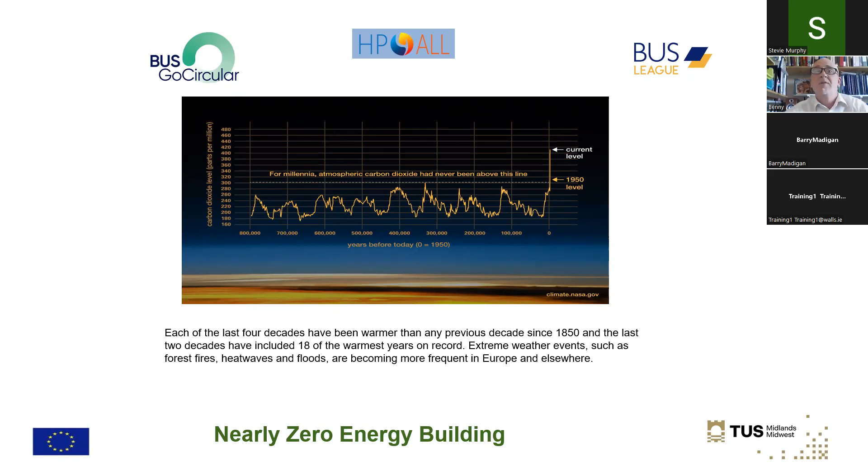So basically how it all started with the Energy Performance of Buildings Directive in 1997. The Kyoto Agreement came through, and then we had the Energy Performance of Buildings Directive. It was recast, and it's actually being reviewed at the moment. I might throw a controversial one in there - I've been in discussion with people looking at European level, and nearly in the future it's probably going to become net zero.

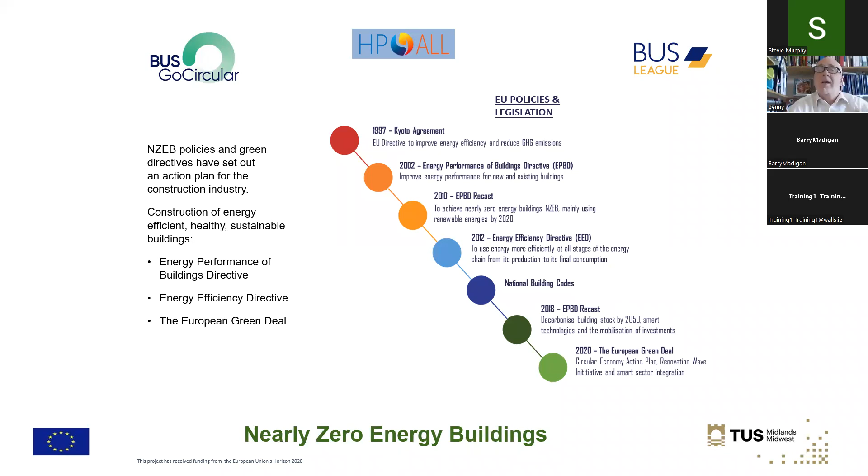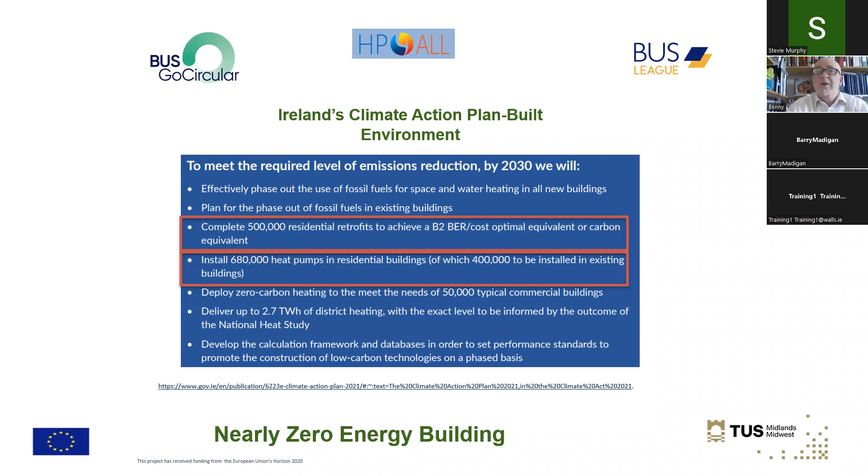Over an annual balance of a year. So this is the Irish Climate Action Plan, and two of the big pop-outs for us at the moment in buildings: 500,000 retrofits have to be done to a B2 BER - a lot of them are being improved, we're hearing better now than a B2 - and install 680,000 heat pumps, and 400,000 into existing buildings. So big targets there, big requirements for us in the future.

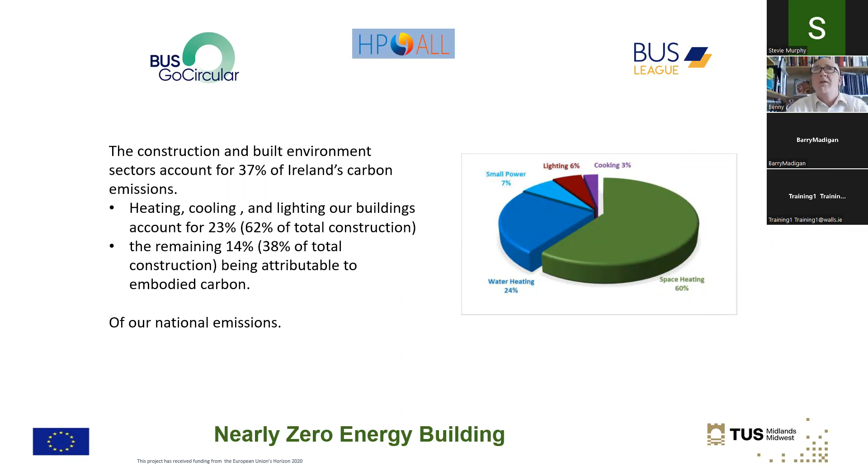So the construction and built environment accounts for 37% currently of Ireland's emissions, heat and cooling, lighting 23%, and the embodied energy and carbon emissions due to life cycle analysis - we'll talk about that in, I think it's webinar 8 - is 14% of our total emissions.

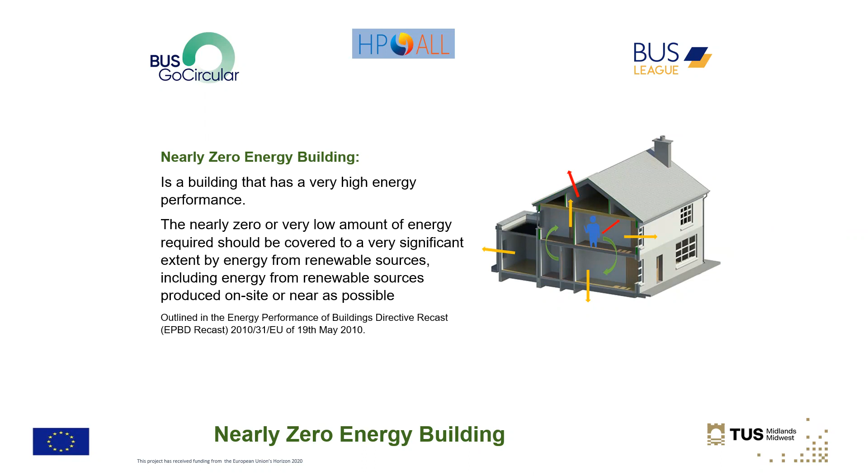So nearly zero energy buildings from the EPBD, Energy Performance of Buildings Directive, means high energy performance, low amount of energy required, and covered significantly locally or close by or nationally by renewable sources.

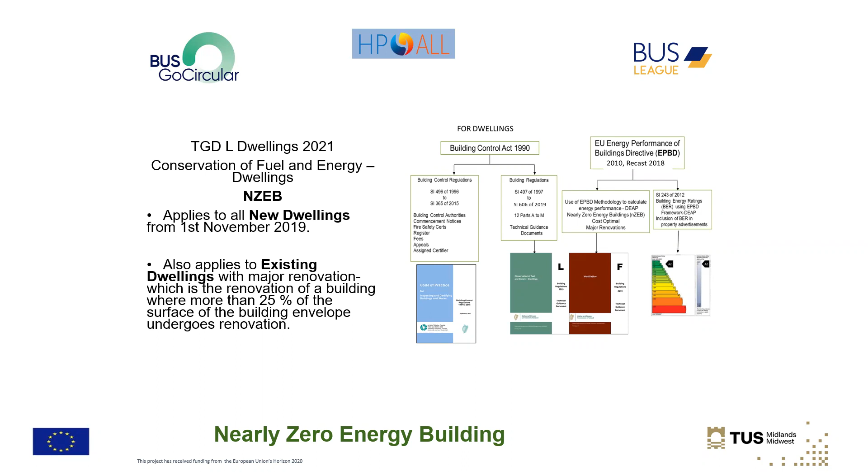So they were updated in the 2019 Part L Conservation of Fuel Directives, and updated again in 2021. Not a huge amount changed in 2021, but it's still a good document to read. It applies to new dwellings, and to existing dwellings where there's a major renovation, responsible for over a quarter of the building envelope surfaces. There's ways of calculating and looking at that in Part L - won't go into it in too much depth.

So to certify the building and see that you're in compliance, we use the Dwelling Energy Assessment Procedure, which is the DEAP, which the BER assessor has to model and comply with.

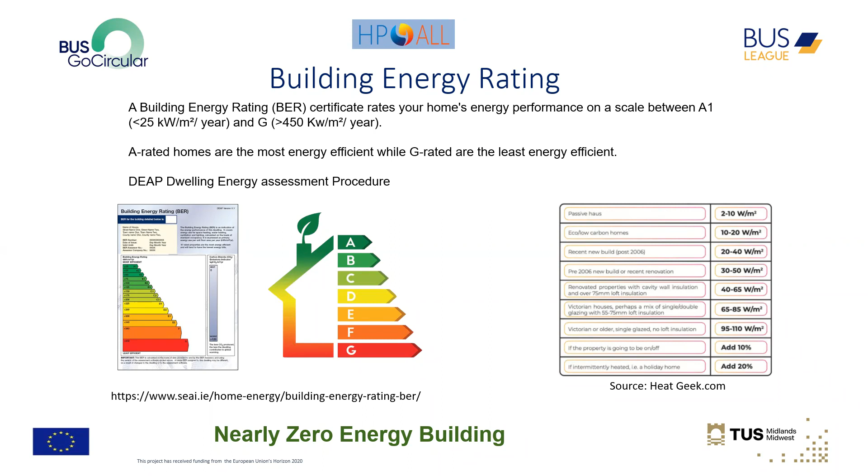So currently it's 70% of an improvement on a dwelling from 2005. The EPC, the energy performance coefficient, and the carbon performance coefficient have improved by 70% and 65% respectively. The renewable energy ratio is 0.20, which is 20% required.

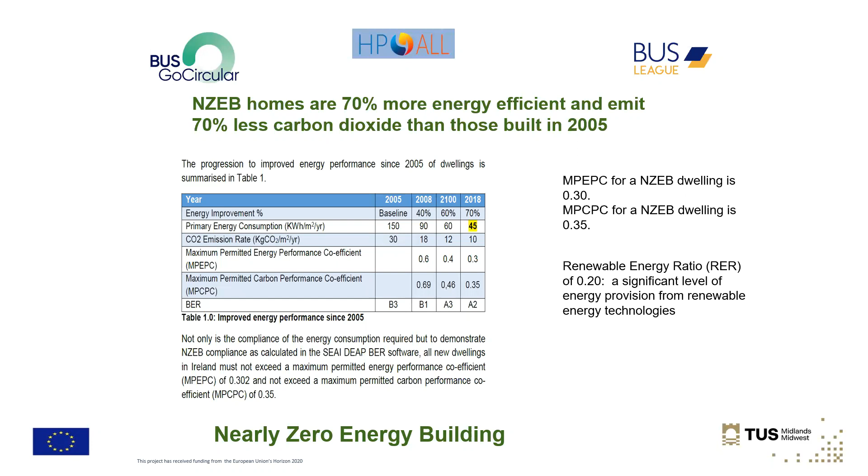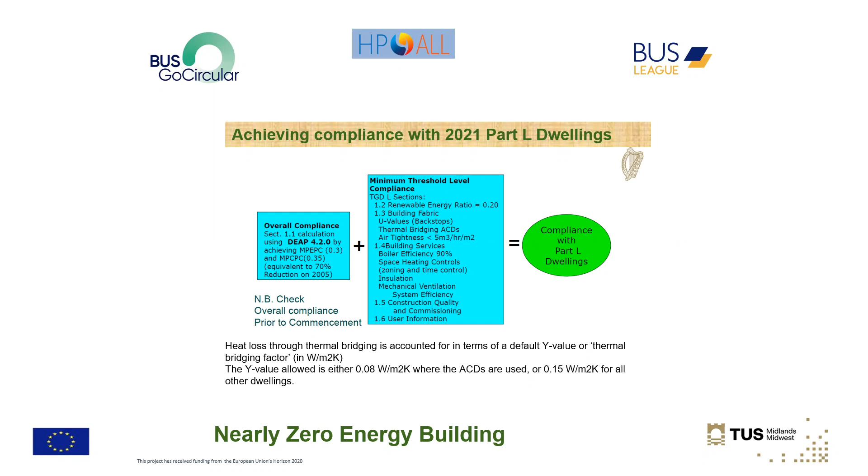So as I already mentioned, how we check that that's compliant with the building regulations is through the DEAP. And there's a big thing I've noticed in modeling - if you use acceptable construction details, your psi value for your building's thermal bridging goes down quite significantly, and you get a better performing building, but it can also bring up your BER rating.

So this is a nice little photo that we took when we were in Mount Lucas, which gives a bit of an overview. It shows continuous insulation, airtight vapor control, low thermal bridging, reduced psi values, high performance windows, mechanical ventilation where required - that's if you're below 3 cubic meters per square meter per hour.

Which we're finding a lot of buildings are getting without even trying too hard. They're able to get it because the construction training of NZEB is proving that it leads to better performing and better delivered buildings.

High efficiency heating, that's looking at your heating system, thermal losses, insulation in your heating and mechanical ventilation systems, and also renewable energy.

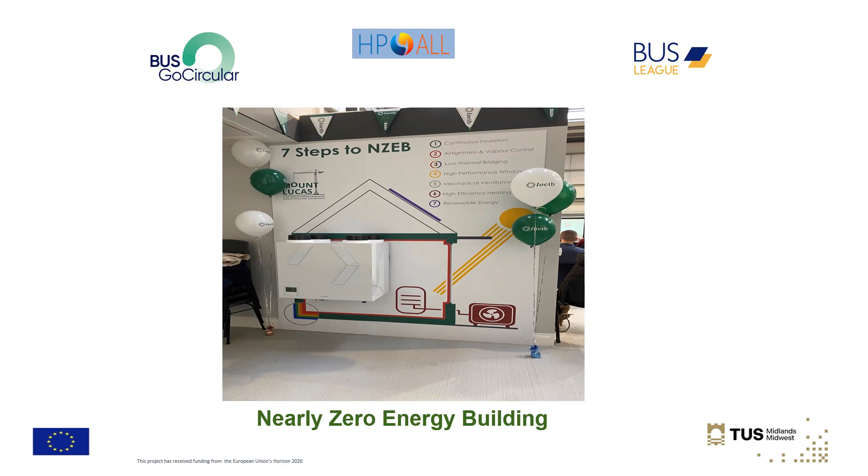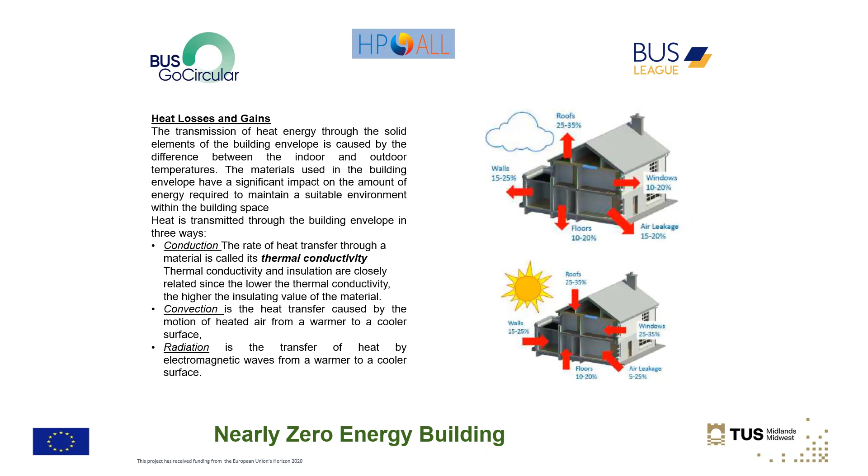Heat losses and gains, as shown in the picture on the right hand side, involve conduction, convection, and radiation, which are different kinds of flows. The heat losses occur during the heating season, shown at the top, and the heat gains, which we're noticing nowadays with overheating becoming a thing in buildings across Northern Europe where it wasn't really a thing before, are the gains that can come into your buildings as well.

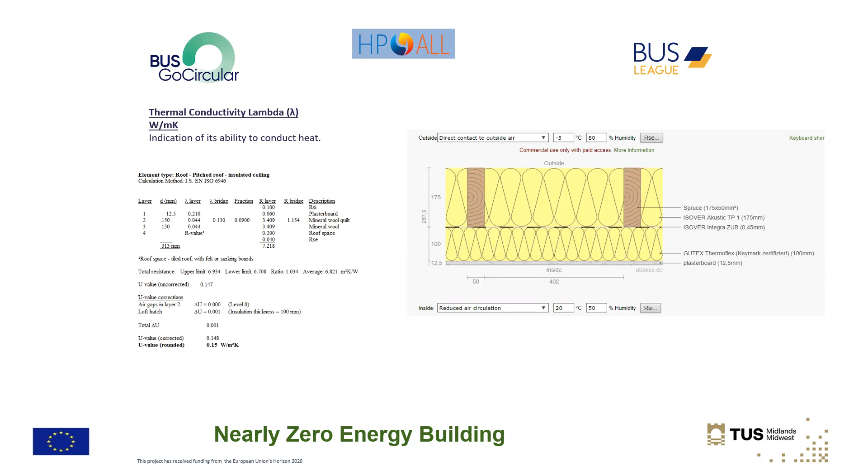So I'll do a quick intro to U values. On the left hand side is a U value calculator. To calculate it, you use all the different elements that make up your fabric, calculate them, and they give you an R value - divide 1 by that and that gives you a U value. I've given a quick picture of a U value calculator I use, which is quite good and gives a nice 4-page PDF outline of your building fabric's U value. The U values can also be found on page 47 of Part L of the building regulations, TGD.

Also, all manufacturers' websites will give you the thermal conductivity - sorry, not U values, I mean thermal conductivity, that's the conductivity of the insulation material. There's a nice quick calculation someone gave me before: if you're at design stage and want to figure out what thickness of a particular material will give you, using just the insulation, not the whole building makeup.

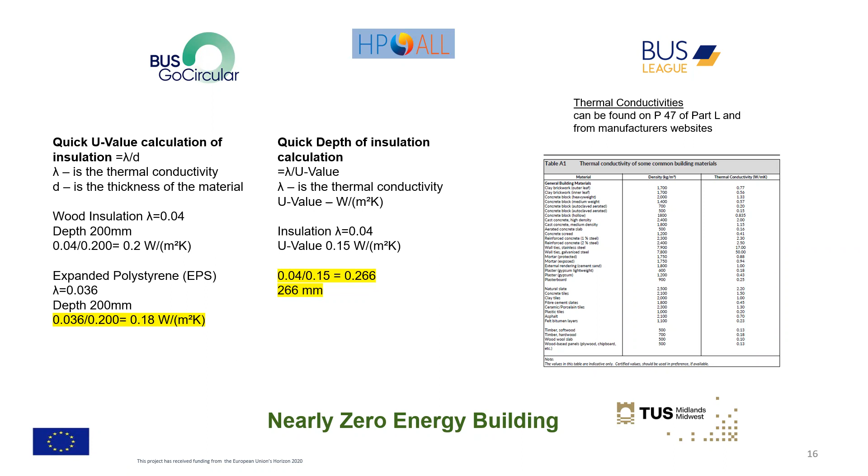So it'll give you a bit of an idea what your U value will be, shown on the left hand side. If you divide your thermal conductivity by the thickness of the material, it will give you the U value. And if you want to reverse that to find out what thickness of material you'll need, divide the thermal conductivity by the U value, and it will give you roughly the thickness required. But you still need to work out the whole build-up, the makeup of the whole fabric - that's just a quick overview.

These are some nice U value calculators that I use. The one on top is the BRE, the Building Research Establishment. The one on the right hand side is Ubicus, and the one on the bottom is a sheet from the PHPP. They're all certified to the standard for thermal conductivity, and I've checked them all across the board - they all work very well. So if you like the internet one, Ubakus, or the sheet tool, you can use whichever one you like.

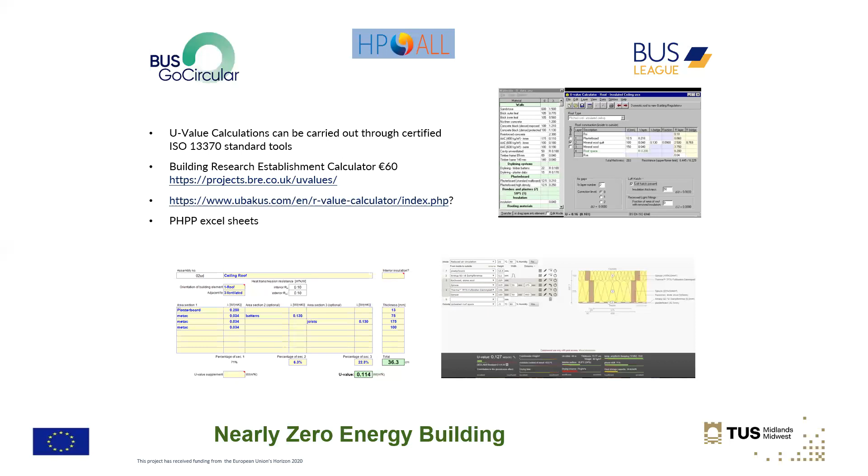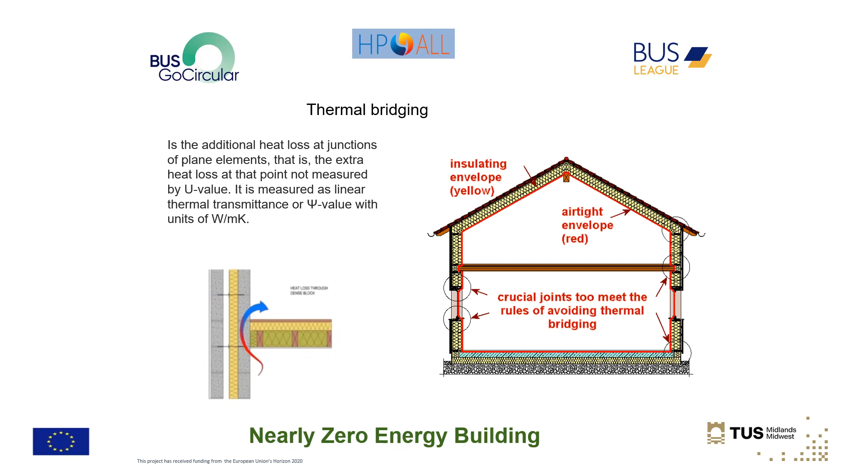Thermal bridging is another big thing, as I mentioned, in heat loss and heat gains - where the plane elements join, so your U values and fabrics join up with each other, and that can be a crucial area. As you can see from the picture on the right hand side, where the thermal bridge and insulation isn't installed as correctly as it could be, there's heat loss there, and that could cause interstitial condensation, heat loss, mold, and condensation on the internal walls - causing issues.

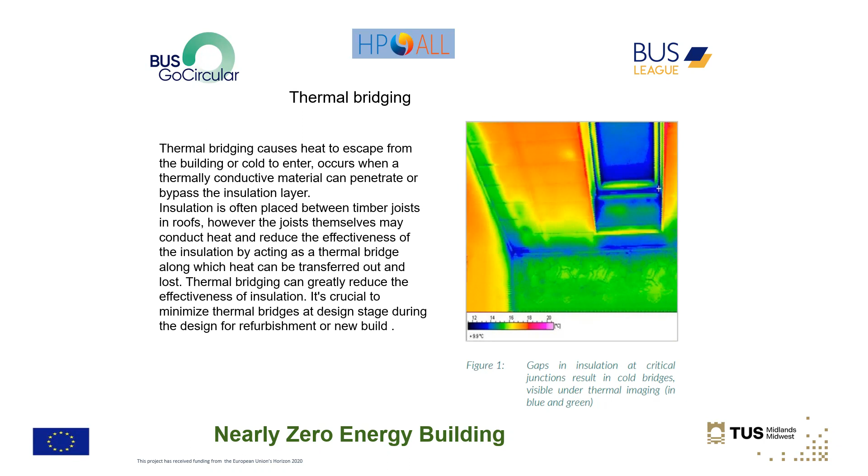And also, we find that mold can cause spores to be floating around in houses, which can affect people's health. So it's not just building heat loss - it's internal air quality and lots of other things at stake too.

So here's a quick review of air tightness, and that's during the heating year when it's cooler outside - your warm air wants to go to the colder area. But if you revert that for the summer season, that's where warm air can possibly come in and cause your house to overheat as well.

In certain instances, they're finding now what's called the heat island effect - in cities and towns, because the concrete and a lot of the fabric and roads are soaking up heat during the day, at night when people want to use their windows for cooling, the radiation and heat radiates back off these elements, causing the air to be warmer, and they're not managing all the time to be able to cool their buildings.

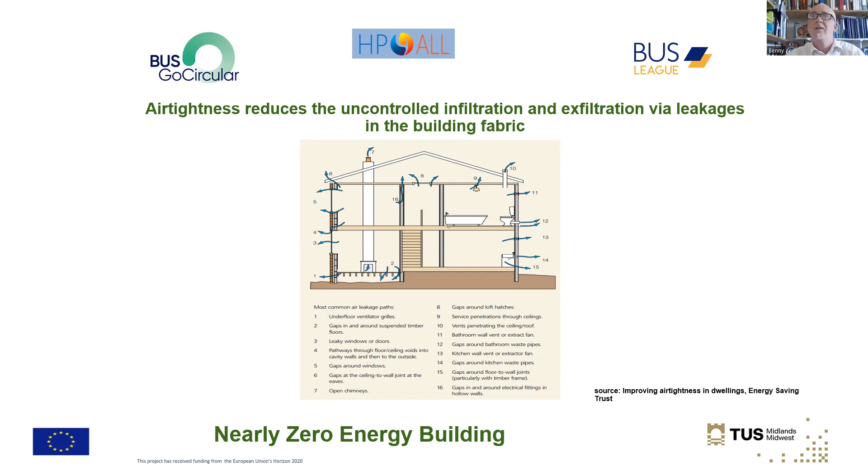So there's a thing about airtightness and maybe cooling requirements in the future, especially in urban areas. I'll just go through the U-values here for new builds in Ireland.

I might be controversial here, but I would not use a 1.4 U-value window if I'm putting in a new window. There are windows out there with a standard of 0.85 to 0.7, and they're about 8 to 10% more expensive than windows of that higher U-value. And doors nowadays, if they're new, can have a U-value of up to 1 - composite doors and all that, and they're all certified.

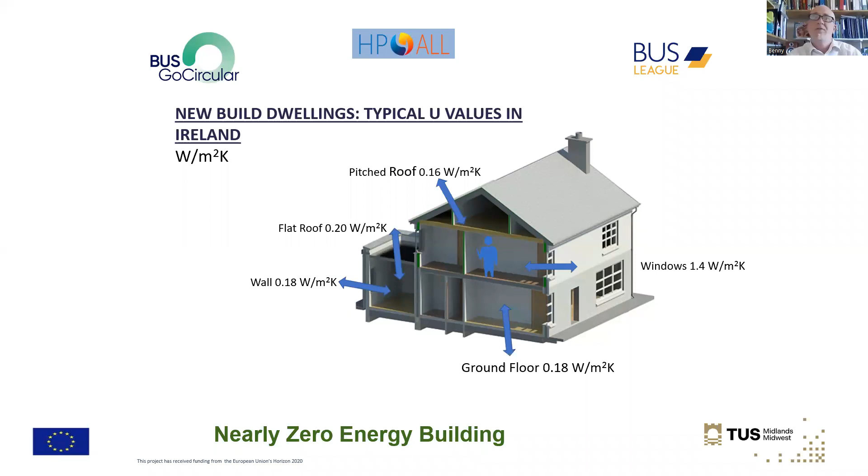So for retrofitting, these are the U-values, and this is if it clicks on that 25% of the surface requirement. But I'll go into that in another section, so I won't mention it yet.

If I'm replacing my windows, not doing them up, I would go for a better U-value than that. That's my personal opinion, because the overall energy balance of the year means it stops heat loss over the winter, but also the good U-value and the good G-value, the solar gain value on the glass, stops overheating as well at certain times of the year.

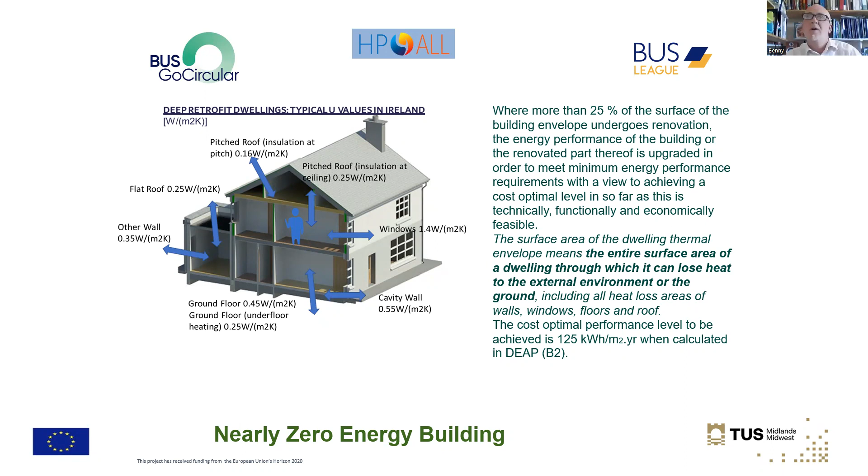East facing, the air is not too hot in the morning, but south all during the day and west during the evening when the air is warmer, the radiation can get into your house more easily. So I'm open to any suggestions that might disagree with me on that, but I would go for as low a U-value for your windows as possible if you're replacing them.

In architecture, with historical and heritage buildings, we have to look at the whole picture. We can't just go in there and, as I joke about, put plastic windows into Kilkenny Castle or retrofit Dun Aengus with external insulation. We have to look at the heritage and the culture of things and do what we can.

There's lots of materials out there that work really well with older buildings. They're breathable, they've got more heat attenuation, and they're able to soak up heat and give it away.

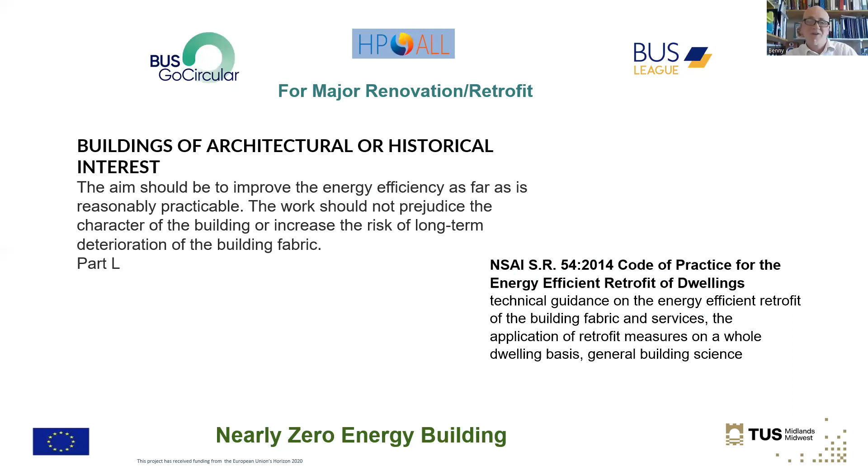The code of practice is a very good document to read over as well, the SR 54 - there's a lot of good information in there. There's a lot of reading to be done when you want to get into this stuff, and I suppose I don't have a TV, so I've done a lot over the years.

The grants available at the moment for major retrofit for dwellings include a one-stop shop which looks at the whole picture and wants to do the whole retrofit in one go. And then there's individual grants - this inverted triangle gives us the climate impact, but all these measures are actually worth doing, including energy storage.

I have batteries at home now. My solar PV is producing more electricity than I need - the load on in the house is only 400 watts at the moment, but we're producing about 5 kilowatts, so my battery is charging. There are options for renewables where you can heat your water and maybe even turn on your heat pump in the future.

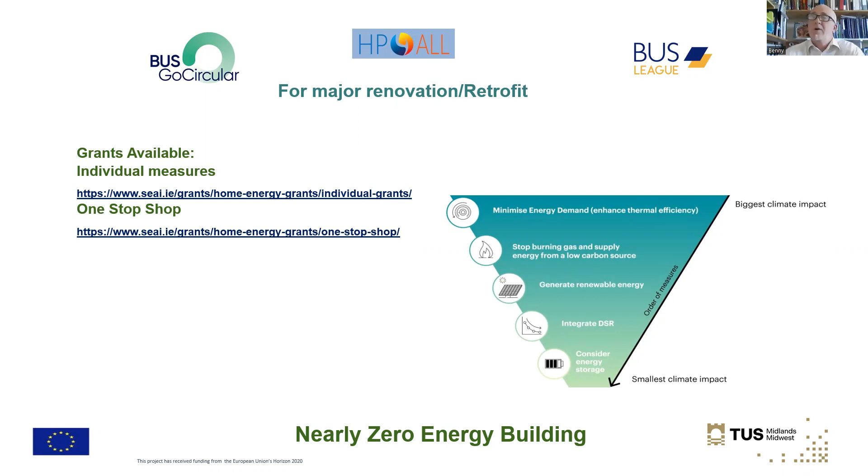This is the smart buildings concept. Another thing we're looking at with the Tipperary Energy Agency SuperHomes and the IGBC is to have a building passport. So if you don't have the facility at the moment to retrofit everything in your building today, this week, or this year, you have an overview and assessment - a passport that shows all the measures possible in the future.

And that means that you might not do something today - insulation, windows, or airtightness - that you might have to go and change in the future.

So it gives an overview and a potential for your building. We're looking at maybe having a logbook for a car, which is about 1.5 inches thick, 40 millimeters, 48 millimeters. But sometimes when you get a house handed over to you, you get a key and one sheet of paper.

Whereas we always believe, when we were installing renewables and doing sustainable buildings at the time, we'd always give the homeowner a day with probably the plumber, the installer, even the electrician, and someone that we'd all go through and show them how the building worked and how all the heating systems function. Because when we've got smart buildings, the occupants need to know how these buildings work and how to adjust different bits and pieces for heating.

I always believe that it takes at least a year or two heating seasons to figure out how your heating system is working, because certain things work differently in different circumstances.

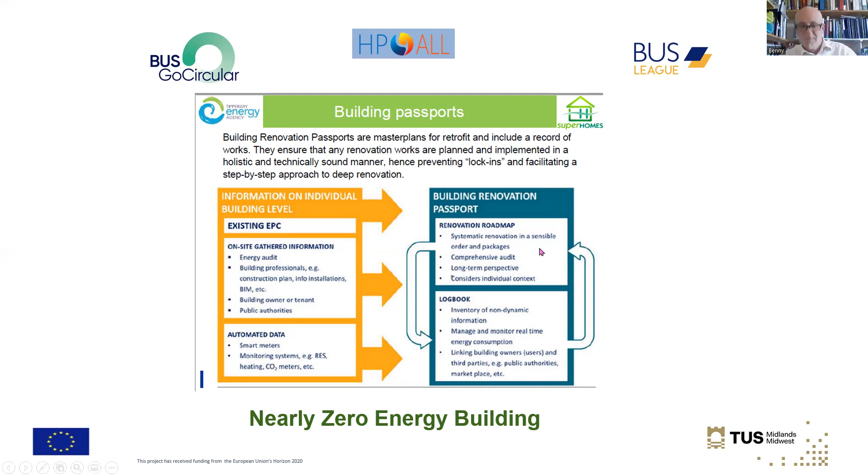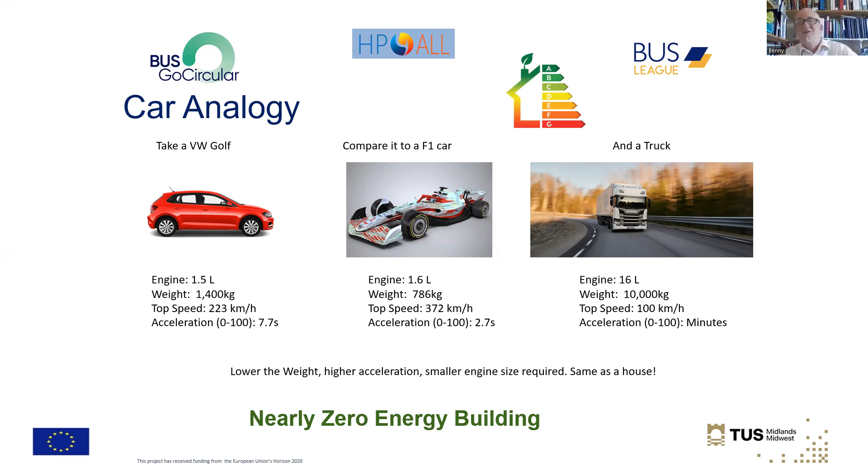I'll just show you there on the wood pellet. I have a wood pellet stove that heats my underfloor and does my space heating as well. It's cost me €1,200 - I love data - in the last 4 heating seasons. So it's basically cost me 300 quid a year to heat my house at the moment.

Our heating system isn't quite to passive standard - I failed a bit on the air tightness test - but we've had our heating off since March, and probably won't turn it on again for a while. We haven't turned it on before towards the end of October in the last 3 years.

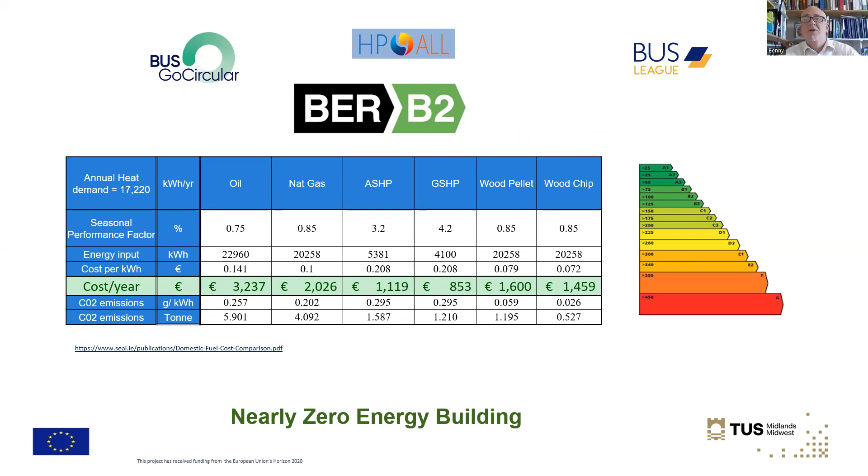So I modeled, I just did a quick thing in the BER DEAP there just to show you how you can get even from an A3, which is energy at 58 kilowatts per square meter per year. That was quite high efficiency with good planes and a low heat loss indicator.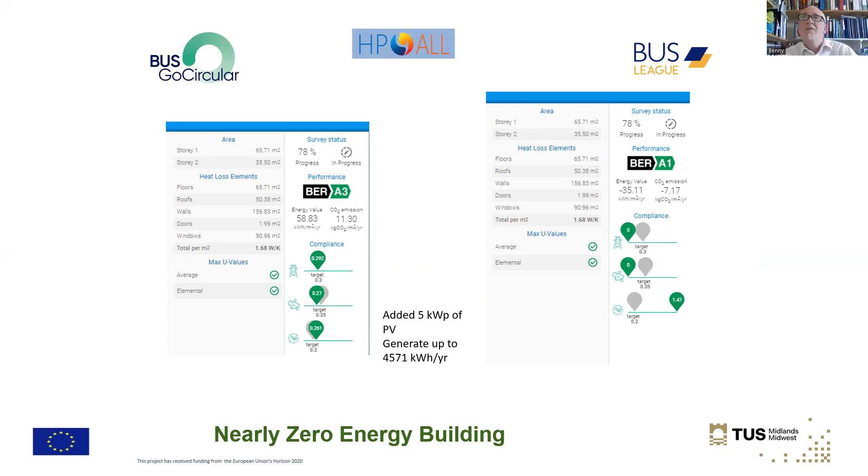And I threw on 5 kilowatts of PV into the renewable tab, which generates 4571, and that turned the house into an A1 minus energy rating. So it's actually negative energy use and negative CO2 emissions. Just showing you there that renewables are a good option in certain circumstances.

So I suppose smart homes of the future will be where everything talks to each other. Your solar system will talk to the house, and if it could heat the water or charge your car, if that's what's required, or charge your battery that you might have in storage.

In the future, if you've got too much solar, even in the winter, it might turn your heat pump on. It could go to sell to the grid if somebody down the road needs some. You can donate to the grid.

We're doing a pilot scheme with the IERC and Glasgow Energy at the moment, where I could virtually donate electricity. I spilled 1.7 megawatts, 1700 kilowatts to the grid in the last about 150 days, but for the 200 or 300 quid extra a year, I'm not overly pushed on that - I'd probably spend more than that on coffee. So I wouldn't mind donating virtually to fuel poor houses in other parts of the country.

So if you can instruct the utility to take it off, it can be done in the future. We're not there yet.

And obviously rainwater harvesting is another very big thing that we installed in a lot of houses in the past, because we're looking at the loads. The reservoir levels are getting down, and I've been involved with Trinity College guys with a couple of hydro projects, and we looked at rainwater harvesting and stuff like that as well. We only need about 1-2% of our water needs to be potable drinking quality.

So the other note said we'll just call it 90% can be our rainwater, and it can do the flush the toilet. We can wash in it. We can wash our clothes. We can even use it in the dishwashers and all that. And you can actually get a filtering and upgrade system where the rainwater is certified to potable quality.

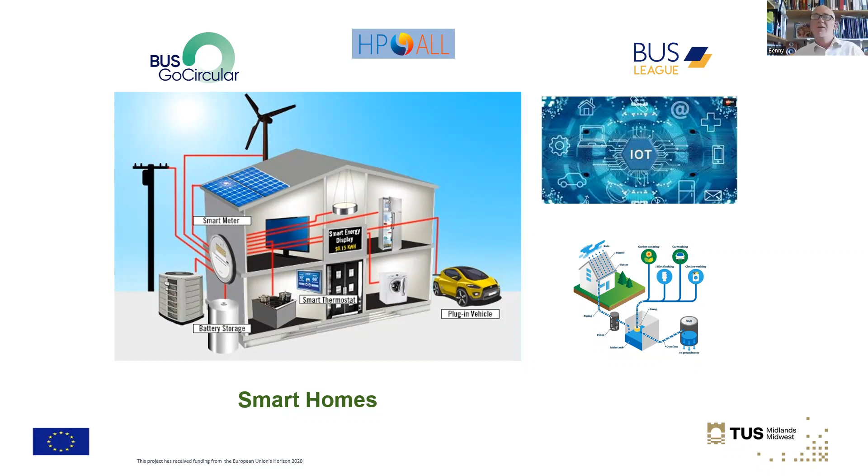I think in the future that will come more into the DEAP assessment, because the guys from Trinity made a nice point once: why are we flushing food down the toilet? Because it's a food grade substance, potable water. Stop talking about that now.

So the other thing is modern methods of construction. I'm in touch with PJ Rodden on certain things there, where offsite construction is more efficient, it's faster, it certifies a lot of the different parts of the fabric, and it can speed up and deliver faster, better houses. It's got lower embodied carbon, lower waste, and lower other impacts.

We also have on the left hand side here a project called BIMzeED we're doing, which is BIM and NZEB all mixed up together. If anybody's interested, you can go and log into that site. We've got 12 learning units there that are very informative, which we worked on with a good few European partners, and all the information is free. The website's open for the next 2 years, with PowerPoints, PDFs, everything free to download.

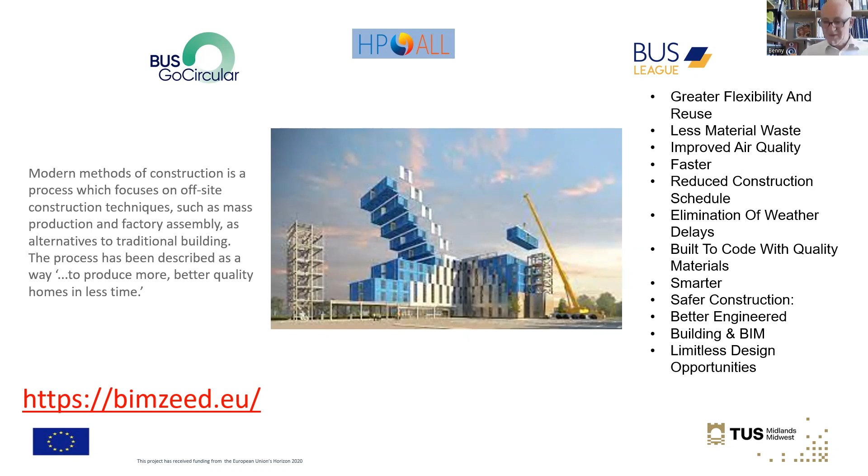So just a quick overview now - I think I'm 23 minutes over time - an overview of some of our other projects.

Our green public procurement project is where we're creating training. Stephanie's creating training for an online training course which we're going to be delivering in September, aimed at local authorities. So if anybody here today works for a local authority and is interested, give us a shout and we'll put you in touch with the project lead.

This one, BUS GoCircular, is where we're looking at blended measures to get energy demand and training for NZEB across the whole sector. This Build Up Skills app is also something we're working on.

We work with the SEAI, IGBC, and it was just two of us before I came along. It's a place where in the future you'll be able to go and look for training for your particular role - whether you're a carpenter, a professional, a BER assessor, a certifier, an architect, or whatever - and it'll give you trainings from NZEB kind of ETBs, which I'll talk about in a minute, as well as degrees, masters and PhDs. So it gives you the whole overview from maybe a day's training to 5 years training.

We're looking at possibly in the future being able to certify that I've done these courses. And if somebody was looking for someone with these skills, they could go onto this app, find a person if they've shared their GDPR information, and look for them maybe for employment or whatever. So we're kind of working on that with Jan in Holland at the moment, who's our lead on the Build Up Skills app.

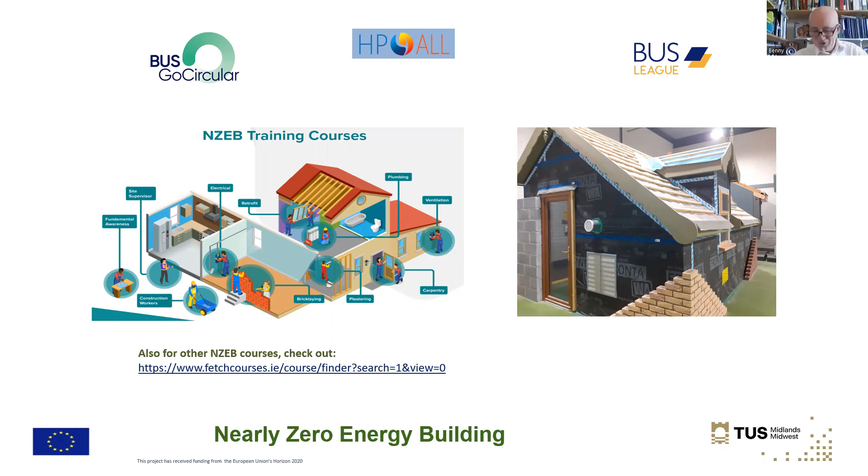And then we have our DASBE, Digital Academy for the Sustainable Built Environment, and these courses are what we're developing now at the moment, and we're teaching. There's new ones coming on online. I think I'm supposed to be helping out with a bit of teaching in the future. So if you want to contact anyone to get more information about that, Liz O'Brien is the DASBE manager.

And then we have the BUS GoCircular, which another friend, Martin, is leading on in Ireland, and it's basically about multifunctional green roofs and how they work together. So we're increasing market demand for circularity skills, so everything stays in the circular economy.

Develop training courses, bringing more women and youth into the construction profession, and add to the circular skill, because at the moment 12 to 16% is women in the construction sector. We need to increase that, because they find more gender balance in projects and on sites, and even at the design stage, people work together and the delivery and the outcomes are better.

So that picture at the top is me, young fella, doing the virtual reality training with Barry at WWETB, and we're bringing down another load of transition year students as part of this project next Monday to do virtual reality training. It's virtual reality in retrofitting, so you get to go put in a window, insulate around it, do air tightness, insulate an attic, and all these types of things. It gives people an overview and an introduction, and then you can go and look at the actual rig, like the picture I showed you there.